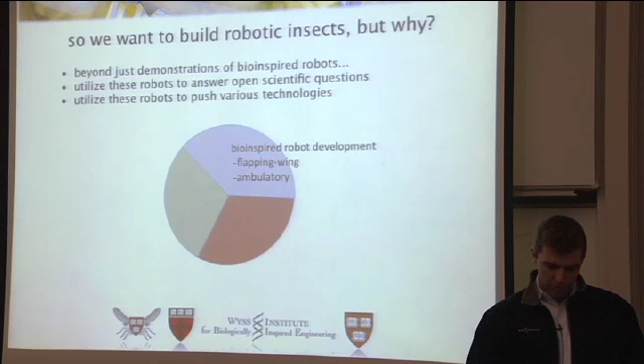One thing I'd like to clarify first is that we are roboticists, and we're making, for example, robotic insects. Why do we want to do this? Not just to make cool robots. In fact, we think a number of different things will come out of the development of flapping wing micro-robots, ambulatory micro-robots, in terms of open scientific questions.

So using the devices for questions in, for example, low Reynolds number flapping wing flight, pushing different control techniques for computation-limited systems, system-level design, as well as doing some technology pushes, like how do we build at these interesting scales, how do we think about milligram-scale power electronics, novel sensors and actuators, etc. These are the themes of my group.

What I'm going to talk about is a little bit of an overview of insect flight to get everybody on the same page. How do we build these things? If we can build them, how do we start thinking about design for these systems? In particular, they're extremely complex, and I'll get into that.

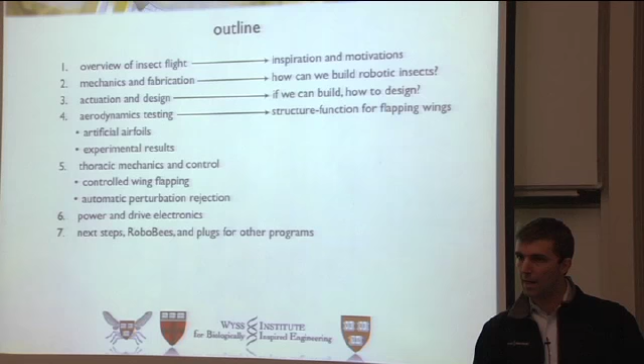As I mentioned in the previous slide, how can we use some of these devices to study structure-function relationships for flapping wing devices, both natural and artificial? How can we think about control for these systems? How do we power them? And then in the end, if I have time, I'll talk about a new program we have called RoboBees, a large NSF program developing a colony of autonomous robotic bees, as well as some of our other work in soft robotics, programmable matter, ambulatory robots, and soft orthotic devices.

First, to get everybody set up on the same page: how do insects fly? This is remarkably different, of course, than what we would consider for classical fixed-wing aircraft. In fact, a lot of these insights were discovered by one of our colleagues back at Berkeley, Michael Dickinson.

He did some very phenomenal work creating dynamically scaled models of what actual insect wings are doing. He observed actual insects, Drosophila in this case, in free flight, looked at what the wings were actually doing, created dynamically scaled models of these systems, immersed them in things like mineral oil to match Reynolds numbers, then flapped those same trajectories in the wings and measured forces and moments acting on the wings. They were able to identify some key components of what they collectively called unsteady aerodynamics.

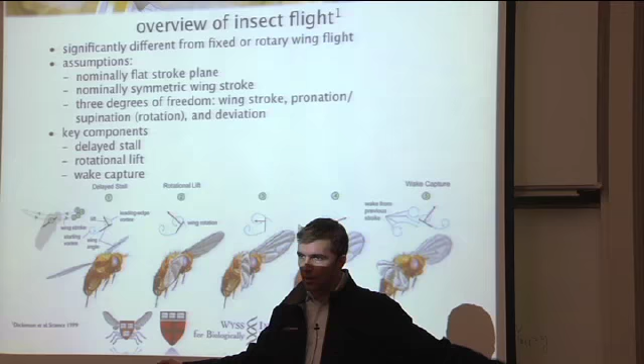Assume we have an insect with two wings, like flies, with nominally flat wing trajectories, symmetric and periodic, with 2 degrees of freedom. There are 3 potential degrees of freedom in the 3 Euler angles, but I'm only going to talk about flapping the wing in a horizontal stroke plane and simultaneous rotation, pronation and supination about an axis parallel to the leading edge. You can think of this as treading water in air.

And what they were able to do is identify, quantify, and qualify different flow phenomena associated with these motions at the Reynolds numbers we're talking about. These things are as follows.

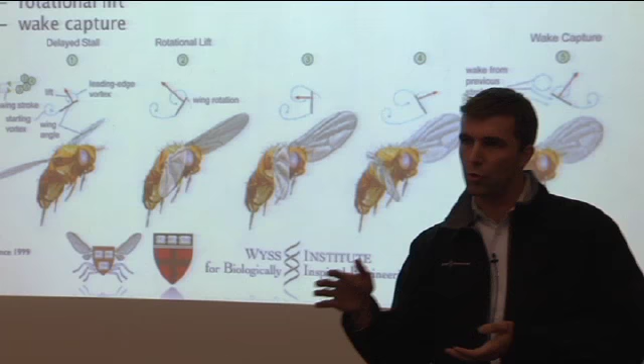Insects, and flies in particular, are able to maintain very high angles of attack throughout the majority of the wing stroke. If you took an aircraft wing at higher Reynolds numbers and put it through even modest angles of attack, the leading edge vortex would grow, become unstable, and shed, causing a catastrophic loss of lift to drag ratio - that's called stall. Insects have the capability to delay stall through mechanisms that stabilize that leading edge vortex. I'm not going to get into those details, but that allows a large angle of attack throughout the wing stroke.

That's one component. Rotational lift - at the end of each stroke, you have this quick flip, which gives you a rotational component to your force, in a way like a curveball.

And then finally, there's this pocket of fluid that I'm carrying behind my wing. As I reverse my stroke, I hit that fluid to get an instantaneous increase in the effective velocity that I'm seeing. So all of these sum up to these unsteady aerodynamic things that are happening, and they gave us an understanding of what's going on.

They basically said, well, you do a number of these different things - you move your wings in this particular way at these velocities and kinematics, and you should be able to do things like get off the ground, which is what we showed. So that's great, now we're all on the same page.

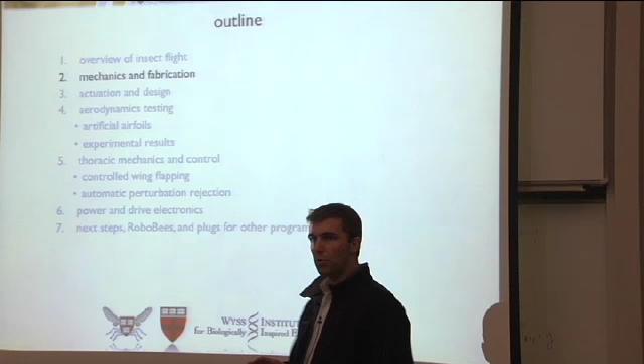Now we get into topics of, with that understanding, how do we start thinking about building these structures? First thing I'm going to do is get into a little bit about the basics of the structures I'm going to talk about.

We're talking about a structure which can flap its wings, 2 degrees of freedom each. It looks loosely like this, with some actuator - I'll get into the details of all these components - which has a roughly linear output, and a transmission system which maps the linear motion of the actuator into rotations at the base of the wing hinge, creating some of these motions.

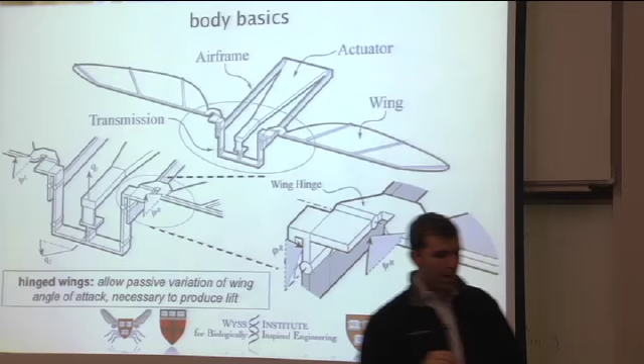So we take advantage of some passive dynamics, and without getting into too much detail, we think that's a very effective and efficient thing to do for power distribution, for something that's putting the vast majority of its power into overcoming mg. Okay, so that's the basics.

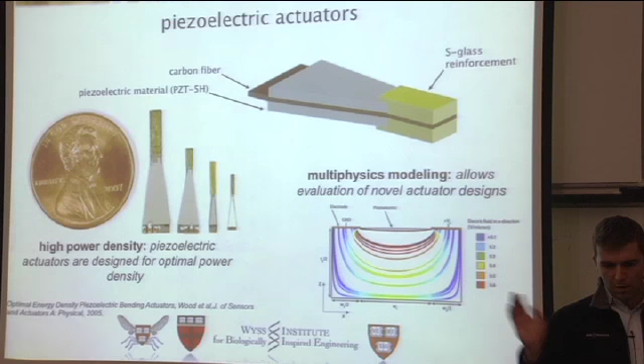Piezoelectric actuators - I'll come back to this - but we have the ability to manufacture piezoelectric actuators which are appropriate for these scales and operating frequencies, probably not appropriate for much larger scale systems, but for these they work fairly well. I'll get into that later on.

Because we're going to start trying to look at how the wing is moving and deforming during flapping, and how we can understand those different deformation modes in terms of the aerodynamic structures of the wing. Question - what's the scale, size scale? The wing itself is about 15 millimeters, so this is about 15 millimeters.

So, okay, that said, how do we start to build these structures?

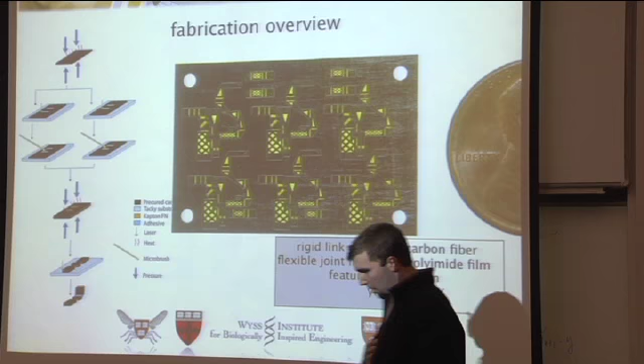I usually put this in a motivation slide, but I figured I didn't need to, since we're not going to be building these structures with macro-scale machining techniques. That should be fairly obvious given resolution limitations, as well as the things you'd classically do at larger scales using bearing joints or rigid links. The physics of scaling says that as you get smaller, your surface area to volume ratio increases, and things relying on surface contacts become extremely inefficient or simply freeze up.

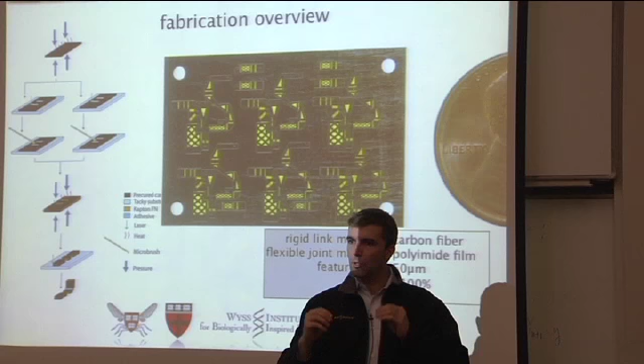So instead, very intuitively and simply, we rely on compliant mechanisms, flexure mechanisms, with distributed compliance about quasi-two-dimensional structures. I'll briefly explain how we make these things. The basic structure is simple: you have two rigid face sheets of some rigid material, typically composite materials, ultra-high modulus composites. They sandwich a thin film polymer. Where there are gaps in the face sheets, there's a flexible joint. Where there aren't, there's a rigid component.

The nice thing about this is you can do this in arbitrary two-dimensional patterns. It's provable that given proper design over your two-dimensional systems, you can create three-dimensional systems with any number of arbitrary degrees of freedom, from zero to very large. So after this process of cutting, micromachining, stacking, and laminating, you're left with these different quasi-two-dimensional components.

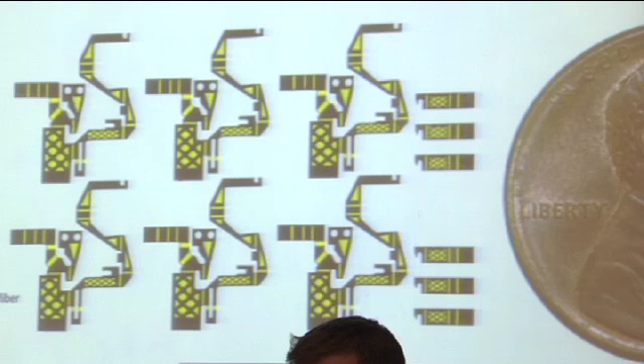We've recently had some nice success in being able to batch fabricate these things. The goal, I should say, isn't only to produce transmission systems with particular qualities, but to do this extremely cheap and extremely fast. I'm very impatient.

Furthermore, our group is extremely empirical. One reason is because we know so little about the things we're studying that we need to build them and learn by doing, learn by failure. So what we really want is a process cycle that goes from concept, design, fabrication, assembly, testing - we always test to failure - and analysis, all within the scope of a week. We can do that now with features on the order of 50 microns, yields nearly 100%, and alignment that's nearly perfect.

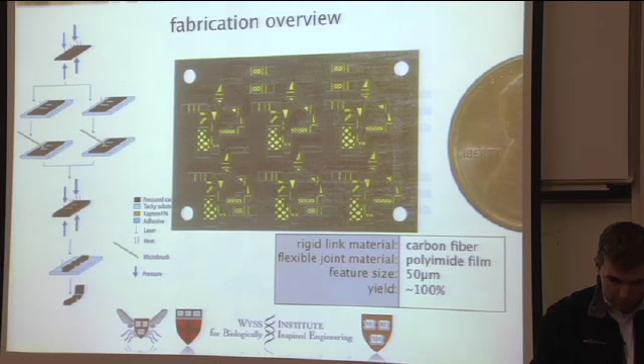Without getting into too much detail, we can use these techniques to make things like rigid airframes, and what you saw on the previous slide are unfolded versions of spherical 5-bars. I won't get into the details, but you'll notice they have features such that when you assemble these things, you fold them into a single configuration forming the three-dimensional structure you want. In this case, on the upper right is a spherical 5-bar transmission mechanism, another variant for flapping the wing in 2 degrees of freedom.

Things like full-on wing drivers, I'll come back to these structures. Nonetheless, we can build these structures - actuators, various components, airfoils, which I'll come back to with more details. This is very important: we want to take notions of the gross morphology of natural wings, for example, and start to understand what's actually going on by building the structures and actually testing them.

So how do we build them? I'll come back to that. Okay, so very briefly, that's how we can make things.

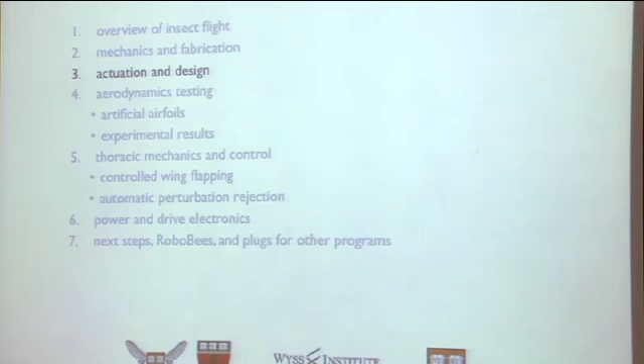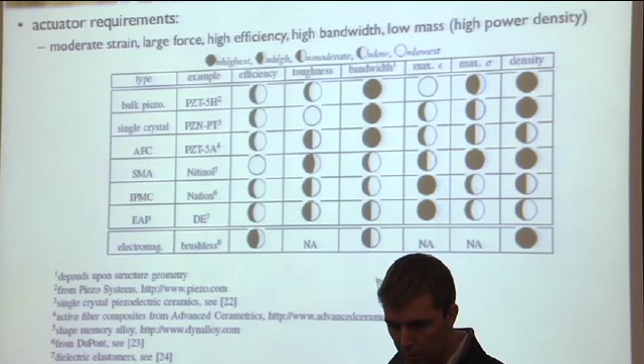Now the next question is, how do we start to actuate these things? This is actually the subject of some of my graduate work, where we said what we really want is an oscillating input into this resonant system. Hypothetically we'd use electromagnetic motors, if it weren't for a number of issues. The physics of scaling says bearing joints are very costly in terms of efficiency, but there are more subtle things, like current density considerations for how much power you can dump into a coil of wires as you decrease its characteristic dimensions. Also, we really want an oscillatory input, so if we wanted a rotary input converted to oscillatory, we'd need intermediate mechanisms.

So what we did was look at a number of induced strain materials - taking some simple stimulus and converting it to some simple length change.

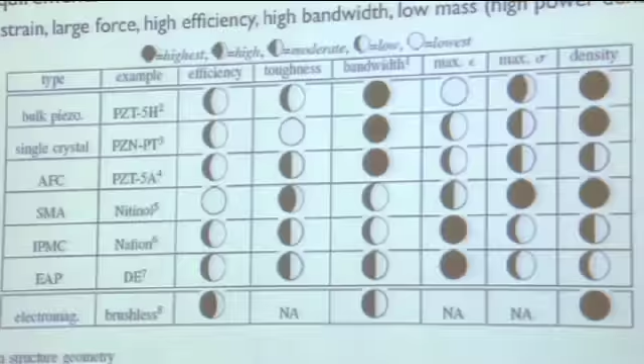Things like piezoelectric materials, be they bulk or single crystal, phase transition materials, electroactive polymers, be they ionic or dielectric - with these we could start to think about very simple models of a harmonically oscillating system, transferring mechanical work from the actuator through a transmission system to the wings. We do this for a couple of design breakpoints for various classes of vehicles, using simple geometric models for what these actuators might look like as a function of these different materials, then ask: as a function of force and displacement, or frequency and work, or mass and power density, what is the appropriate actuation technology?

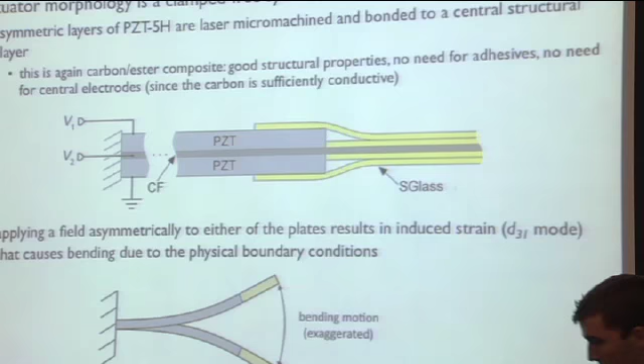We settled upon these quite simple structures, clamp-free bending bimorph cantilever structures. You can think of these as two parallel piezoelectric plates. You apply a field to the upper plate - let's say it wants to contract, but it can't because it's constrained by its boundary conditions, so it bends. You do this on the opposite plate, and it bends the other direction.

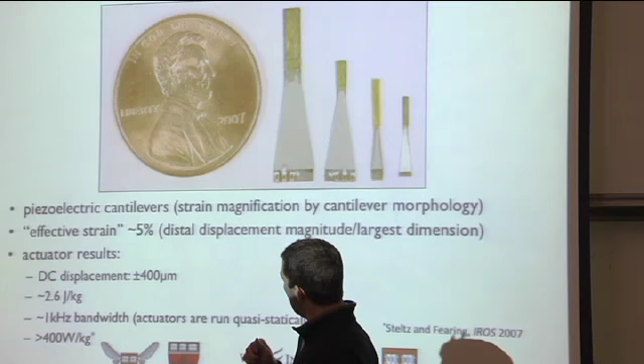They're very simple, very easy to make, and we can make them across a variety of scales. They have a very high bandwidth, which is good for the frequencies of operation we're talking about, on the order of hundreds of hertz. But they have negative sides too - they're quite brittle, basically strain limited in their operation. The point of the clamp-free cantilever configuration is to get an effective amplification, a first amplification stage, turning these strain-limited, like 0.1% strains, into 5% effective strain - meaning the largest distal displacement normalized to the largest characteristic length of the actuator.

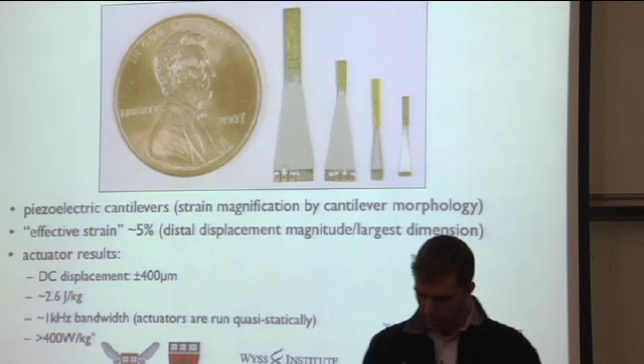But the other nice thing is, since they have a relatively high bandwidth, the power density output of these structures - which is really what we should care about - is approximately a linear function of operating frequency. So we can think about these systems as oscillatory inputs into resonant structures. As the characteristic length of the whole fly, for example, gets smaller, the resonant frequency monotonically increases, and as that resonant frequency increases, these things get better.

We've shown that even though their bulk-free, strain-limited properties are on the order of a couple joules per kilogram of work output - not very good - when operating at 100 to 200 hertz, these things actually get pretty good. They get into the few hundred watts per kilogram range, which is greater than insect flight muscle, and on the order of pretty decent electromagnetic motors, independent of scale.

Now switch gears: we can build things and actuate them, that's great. But how do we start to think about this? The overall goal of the flight apparatus is to provide a platform that stays aloft for as long as possible. So it's not sufficient to just slap together actuators, electronics, transmissions, and expect a nicely operating vehicle. It seems obvious, but it really means we need to do some simple but powerful system-level modeling and analysis.

The point of the next few slides is to say: I've got these different components, they all have their limitations, they could all use more effort to improve them. What's going to be the biggest bang for the buck - for example, if we increase battery energy density or storage capacity, how does that affect the overall flight time, which is our ultimate metric?

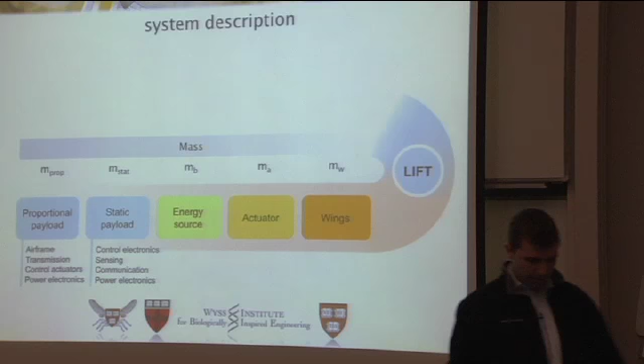We can think about these systems as having two classes of components: lift producers and lift consumers. For lift consumers - payloads, energy source, actuator, whatever - each has an associated mass, and you can think of mass as equivalent to required energy, the energy needed to keep that mass in the air. For lift producers, we think about the energy source and all the different transmission mechanisms - the energy source, the actuator as transducer, mechanical transmission, wings, etc - having certain power outputs, efficiencies, and energy densities.

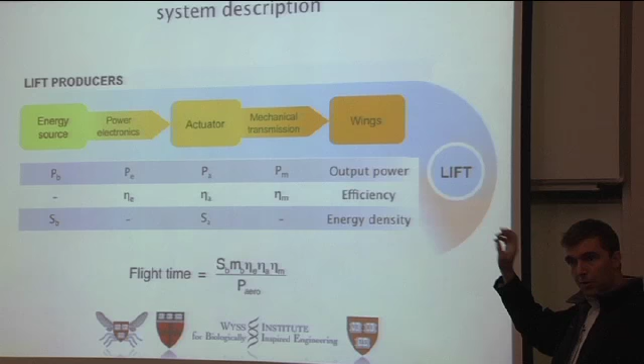And we can then take these and very simply say the flight time is going to be some weighting of all these different terms in terms of the total energy on board, multiplied by all these efficiencies and normalized to masses and powers, etc. And P_aero being the power required to overcome mg.

From very simple first principle models of what's going on here, in terms of how do we model the actuator, how do we model the transmission, how can we do some simple models of the transfer of work from the transmission to the air, how can we start to think about navigating this rather complex design space. And then we can think about, if we combine all these different aspects from models of each individual component and plug them into our equation for flight time, how does that look, and how do our choices for some of these geometric parameters compare to natural insects?

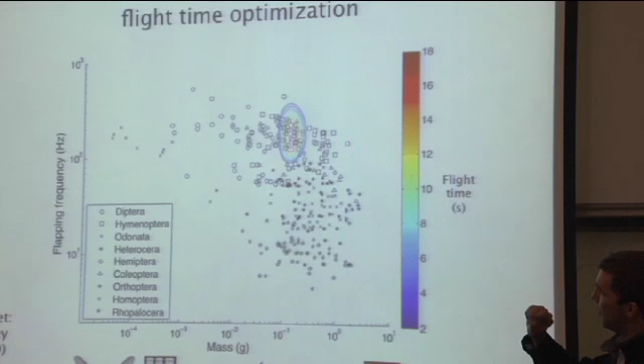So that's what the next few slides are going to show. We can use some well-established trends in the insect literature to say how things like the mass of an insect and its flapping frequency scale, and mass versus wing area, mass versus percentage of flight muscle mass, etc. All of our designs are roughly consistent with what you see across a wide range of different insect species.

But what you'll notice is that given these contours, given the state of the art for all the different components which add up to the flight time estimates I showed in a previous slide, we're estimating a very low flight time, on the order of tens of seconds, which is not terribly good, right?

So what this allows us to do is think about what are our assumptions on where these numbers are coming from. Current existing battery energy densities - we know that from commercial trends. Actuator energy densities - we know that from our own experiments. Power electronics efficiency - we know that from our own experiments. Payloads and these sorts of things - that's state of the art.

What would happen though if we start to improve upon each one of these things? What I'm going to do is say there's some improvement factor from state of the art to whatever that improvement would be, to enhance flight time by improving upon all of these different metrics. And so we can start to look at how sensitive our flight time is, and how this improvement factor changes with changes in these different technologies.

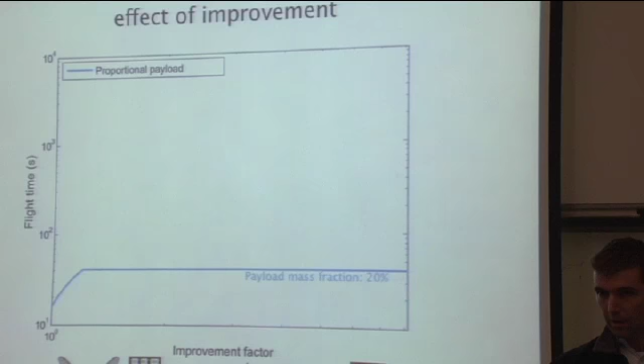So things like payload - well, we also have to put upper bounds on all of these things. Like payload, we have to have some payload for computation and sensing, etc, so we can't reduce that by too much. In terms of actuator energy density, we can increase that a little bit, but we're limited by the strain-limited bulk energy density of these piezoelectric materials, power electronics efficiencies, aerodynamic efficiencies, and the energy densities associated with the onboard power supply.

I'm not going to talk about this, but we have collaborations through the RoboBees project to do micro solid oxide fuel cells, which are appropriate for vehicles of this scale, and we're using that as sort of the best case scenario for what can happen in terms of onboard energy storage.

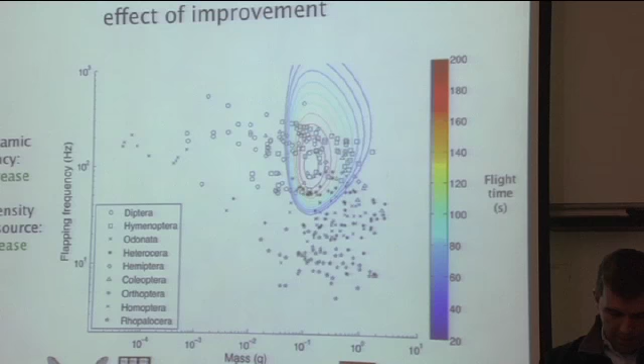So going back to the previous slide - very short flight time, limited mass range - if we start to take some conservative estimates on what we can improve in terms of the different qualities of our system: aerodynamic efficiency, let's say we get 20% better; energy density of the energy source, 50% better - then we can start to improve flight times by an order of magnitude or more.

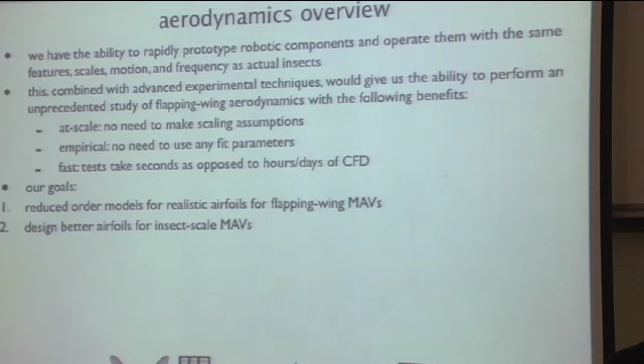The point of these last few slides is just to say, how do we direct our research? So if one of these things isn't going to have much effect on overall flight time, then we're not going to care too much about it. And in fact, what we are going to do is say one of the big wins we think is going to be aerodynamics. So we're going to put a lot of effort into aerodynamic testing, for the purposes of understanding things like the structure-function relationship for natural insects and flapping wing devices, but also for designing better vehicles, which would have higher quality improvements.

To give a higher order overview of some of our aerodynamics testing, a lot of people can start to think about this. If you look at an insect's airfoil, it's quite a complicated structure. You start to think about all of the different design parameters it might have - veins of different sizes, three-dimensional surface topologies, surface texturing, aspect ratios, area distribution. It's very difficult to say what is the function of this particular vein, or what is the function of this surface property.

Some people think about doing dynamically scaled models to explore these aerodynamic properties, and our biologist colleagues have done this, leading to remarkable breakthroughs in understanding. But certain things fundamentally scale in different ways. If you dynamically scale models to match Reynolds numbers, you're matching the ratio of inertial to viscous forces, but you're not doing anything with aeroelasticity - compliance scales in a fundamentally different way. You start to think about doing these things with biological studies, but then you're limited to what you can get biology to do, which is not a lot and very frustrating.

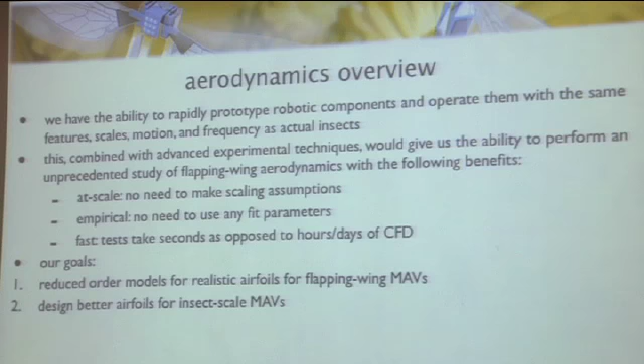We're not computational fluid dynamicists, and furthermore, the things I'm about to tell you we can do in time scales much faster than the best supercomputers can solve the partial differential equations which would define the flow around these structures. So we're not aerodynamicists, we're roboticists, and the goal is to use our tools in fabrication and actuation to manufacture airfoils and flap them around, to study how we understand the role of different morphological features in natural insect wings, and how we can apply this to the design of better micro air vehicles. It's highly empirical.

So the first question is, how can we manufacture these airfoils? We've done this a couple ways. The first way, which I won't talk about much, is to merge our fabrication techniques with soft lithography techniques to make micromolded channels that you use to sculpt carbon fiber venation patterns. If you do this and copy the gross morphological features, at least in two dimensions, of some natural insect wings, it matches up with static stiffness properties, and it looks like it matches nicely to the particular species.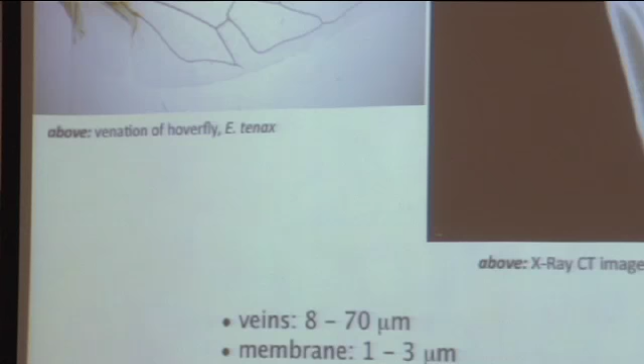But what we really want to do is say - well, that was very difficult to make those wings, so that's the thing I'm not telling you. We'd like to make wings which we can rapidly prototype, consistent with the rest of our philosophy. But it doesn't capture the richest set of morphological features that we might want to look at.

If we look at this micro CT scan of a hoverfly wing, from base to tip it's got these corrugation patterns and really rich geometrical features. What we really want to do is be able to rapidly prototype wings which can capture a lot of these different features.

Now we're starting with an insect wing. You might protest and say, well, why are you just starting with an insect wing? The reality is because we don't know any better. We're starting from basically very little information on these systems, so we figured it was best to mimic a system which does work.

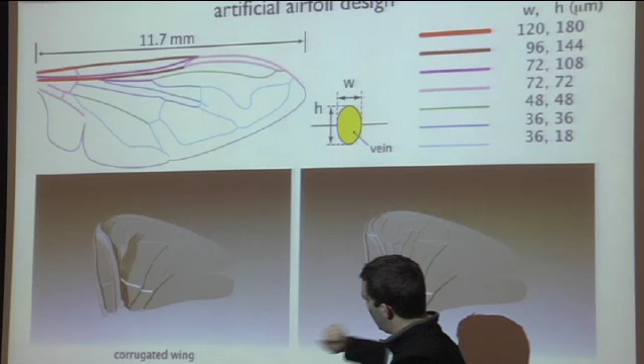So what we did was take that three-dimensional data, create a three-dimensional CAD model, and start to slice this. I'll show you how we recreate this in a minute, but one thing these next few slides point out is that if we can make airfoils with these different morphological features, we can start to ask what happens if I have a 2D versus a 3D wing, and what penalties do I pay for losing that third dimension. I'll come back to that in a minute.

First question is, how do we make these things? We've decided upon a micromolding process which utilizes calibrated laser ablation of, in this case, silicon wafers. You basically take your three-dimensional CAD models of the wings, slice them, and use each of those slices to remove a layer of material from a silicon wafer to make micromolded channels. We can do this now.

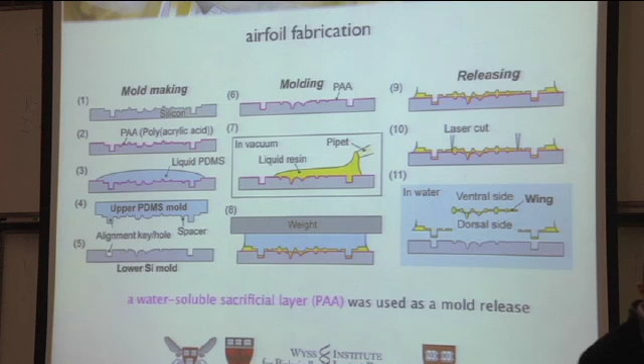Mind you, laser micromachining is a fundamentally aspect ratio limited process, so you're never going to get perfect sidewalls, but you can do a number of different profiles. We had a paper in JMM not too long ago describing the molding process. There are engineering tricks here, like release layers and using compliant upper molds and rigid lower molds, but we can make these molds out of selective laser ablation. You can see the difference between corrugated and uncorrugated molds.

We can make the wings using a molding process. And lo and behold, if you again go back and start poking on these wings and testing their static stiffness properties distributed over the surface of the wing, you get similar characteristics as you get in actual insects, and you do indeed see a dramatic difference between corrugated and non-corrugated wings.

But that's not enough. We'd really like to test these things in a dynamic setting. So what we've done is put a lot of emphasis into an overall system. It's in its second revision now, but the overall vision is the following.

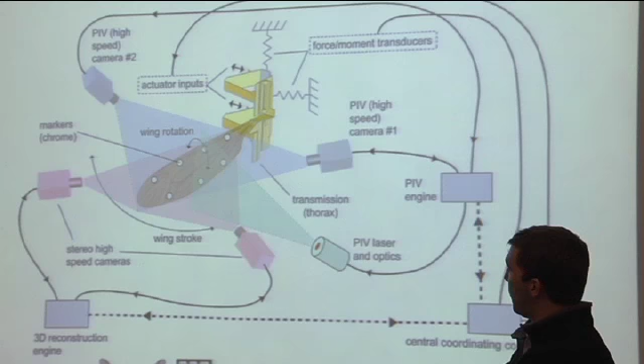You have a system where you make certain wings, maybe put features on the wings, I'll get to that. You drive the wings with multiple degrees of freedom. One of the things I failed to mention is that we can now put feedback control on the internal state of the device, so that we can actually do feedback control over wing motions and get whatever wing motions we want for the most part.

Drive the wings, mount it to a multi-axis force sensor, use multiple high-speed cameras to automatically measure motions and deformations of the surface of the wing, and also illuminate with lasers and look at flow structures if we wanted to, using particle image velocimetry, and trigger and control all of that through an automated system.

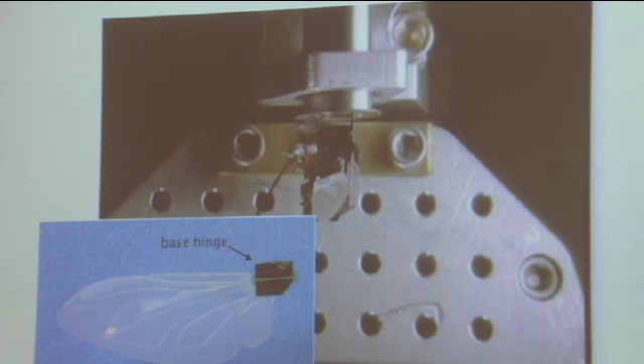Here's one of the first generation results. Here's one of the wings that Dr. Hiroto Tanaka had made. Here it is at low frequencies. Now I'm only commanding flapping in this case, and there's no aerodynamic or inertial load, so it's not rotating with its passive dynamics. Here it is at high frequency. Okay, you all see that.

Of course, you can't see what's going on, so we can start to do these side-by-side comparisons of corrugated versus non-corrugated wings, and start to say, well, qualitatively, there's obviously something going on here. These are taken at 10,000 frames per second, and you can start to see the differences between the deformation patterns associated with corrugated versus uncorrugated wings, and it gets much worse if you start to go with higher aerodynamic loads.

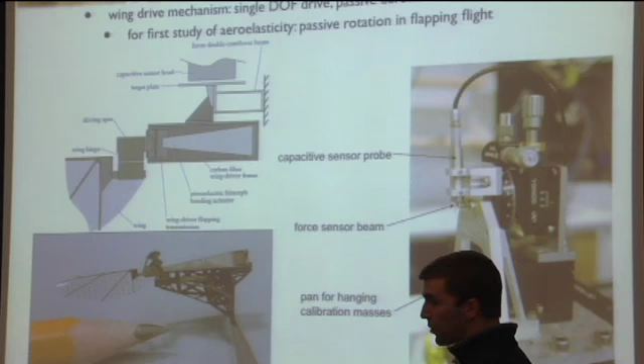All right, but that's still not enough. That's still not quantitative enough for actually extracting anything more meaningful from these structures. What we really want to do is come up with some simplified model for what's going on here, and then use some of these experimental apparatus to look at any number of things. How is this being affected by Reynolds number? How is this being affected by wing aspect ratio? I'm not going to get into all of those details. I'm going to only show you one result.

But basically, we've set up a system. This is the first generation. I'll show you the second generation, where you take your wing structure and you mount it to a force transducer. I think that's on the next slide.

Yes, it turns out that this is a terribly boring subject, but we had to spend a lot of time actually manufacturing multi-axis force sensors. The reason being that there's simply nothing off the shelf which will give you the features that you want. What we want out of these systems is very high bandwidth and very good resolution, and those are paradoxical, of course. You can always make a force sensor have higher bandwidth by trading off bandwidth for sensitivity.

It's almost like the electrical analog of having the gain bandwidth product of an operational amplifier. But nonetheless, you can't get away from that physical reality, and so we had to put a lot of effort into designing a structure which would work on scales of 1 milligram resolution and 1 kilohertz bandwidth, amounting to about 1% of body mass and about 10x the fundamental drive frequency for the vehicle scales of interest. We had to figure out a way to manufacture these things and also do everything we could possibly do as engineering tricks to minimize noise.

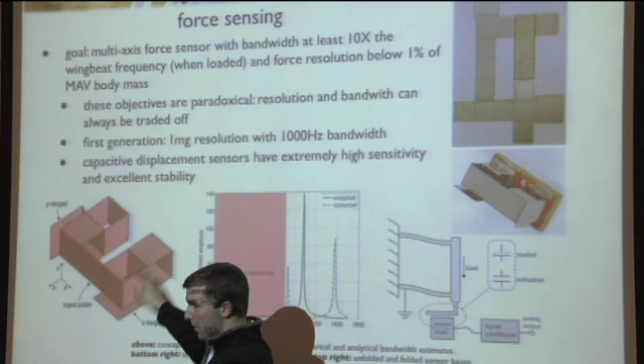Electrical, thermal noise we minimize by making the structure out of INVAR, which is an alloy that has the lowest coefficient of thermal expansion of any alloy in existence, et cetera.

Anyways, it's kind of boring so I won't get into it, but it works. This allows us to do real-time measurements of the forces we measure. We're also making torque sensors, which I'm not going to get into in this talk.

Now let's take a step back. This is our standard wing, which we use to troubleshoot all the different components of the system, where we can take the wing and use shadow masks to put little chrome dots on it. We use some optical microscopy techniques in our high-speed videography to do backlighting so that we can get very high contrast, high resolution images through the high-speed video.

The question is, are there techniques - in this case, one of my students did this a couple years ago - these quasi-steady techniques that exist from work, for example, of Dickinson. People doing these dynamically scaled models can extract out force coefficients which hide all the unsteady terms, which I showed you in one of the first slides, behind these time average force coefficients. You can't just do that - you actually have to look into other coefficients as well. But nonetheless, there are these quasi-steady models. Do they capture the characteristics that we want?

Can we use some of these models to predict things like, not only what is the lift and drag acting on this particular wing integrated over the whole wing, but also can it predict the passive modes of the wing itself, given the fact that you have only one input into the system.

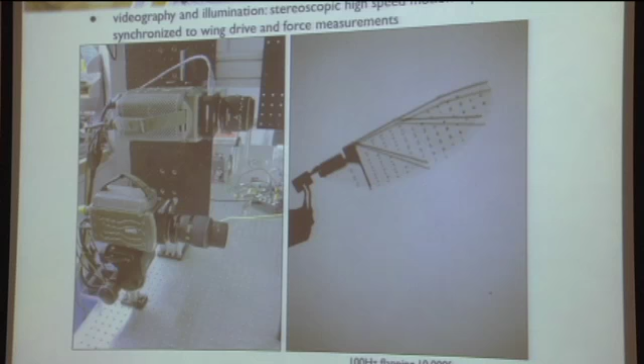So what we did was take these wings with multiple - in this case 2, we're gearing up for 4 - high-speed video camera images, known camera calibration, something called auto stereophotogrammetry. Non-auto stereophotogrammetry is grad students clicking on dots. So taking multiple camera images and doing a bunch of vision tricks, you get out basically a 3D time history representation of all the tracked points. We need 3 or 4 cameras because even with 2 orthogonal views, you get epipolar ambiguities when you try to do some of these vision tricks.

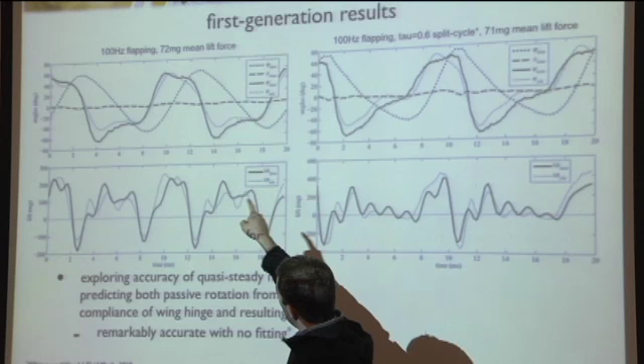Bottom line is, you can ignore the stuff on the right, but on the left the upper traces are us commanding wing flapping angle. We're measuring, using the rigid body modes from the previous video, that we can extract out 3 angles of the wing motion: flapping, rotation, and deviation, and then also measure the forces we're generating and predict the forces based upon those motions in the quasi-steady model, and it matches up very well. The nice thing is there's no fitting here - it just works well enough.

So the answer to my previous question, for this particular Reynolds number - and this is where you should protest and say, well what about other Reynolds numbers or other features of the wing - the answer is, well, that's ongoing. But for this particular Reynolds number, the quasi-steady version is pretty much the 80 or 90% answer.

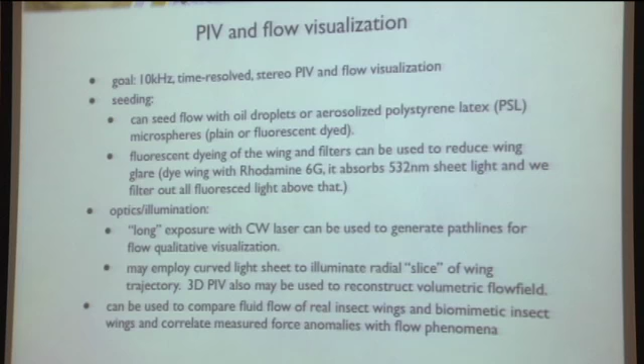We also started some techniques where we can look into the flow structure that we see. We have a system set up now where we can illuminate slices of the flow with a laser - I won't bother telling you about it, I'll just show you. Hopefully this shows up, where we can take the same wing structure and seed the flow with some smoke particles and illuminate it with a light sheet, then process that using commercial off-the-shelf PIV algorithms. Mind you, this is only true at mid-stroke because the laser sheet is not rotating with the wing.

But nonetheless, you can still see some of these classical features which you would expect, like the buildup of a leading edge vortex and the shedding of a trailing edge vortex, et cetera. So this is the first PIV that's been done on flapping wing robotic insects, but that's cheating because nobody else really cares.

Okay, next topic. I'm going to switch topics now. That work is ongoing - I'll be happy to talk to you about it, but basically that sets up the stage to basically set up the experimental infrastructure.

There's things I'm not talking about. We're also developing environmentally controlled chambers where we can suck vacuum or fill with sulfur hexafluoride to do higher density measurements and all these other things, but I'm not going to get into that.

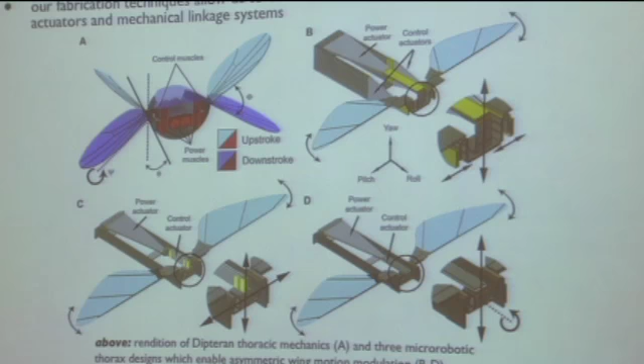I want to get into topics of control, and these are of interest to me. I was trained at Berkeley with some of these topics, and when I got to Berkeley, I was working with Ron Fearing, and this project called the Micromechanical Flying Insect Project had just started. Metin was working on it as well. With my interest, I said, oh, this would be a great controls project to work on, and Ron basically said, well, you got to build them first. So we went off on this tangent of other topics.

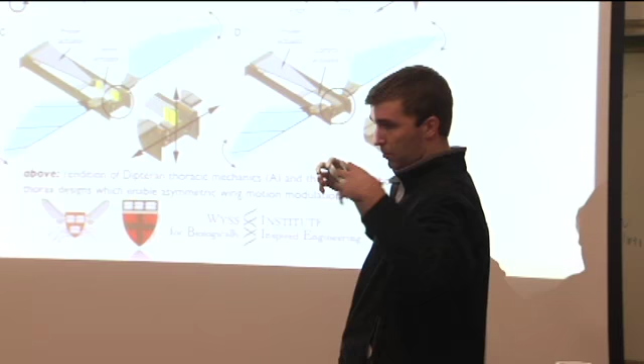But now we're able to actually build the structures, and we can start to think about some of these things. We have systems which we think utilize some of these passive dynamic modes, meaning passive rotations associated with the wing pronation and supination. We're basically dumping all our power into the primary power actuator, resonating the flapping mode, and allowing these other modes to appear passively. We think this is a very efficient way to distribute power in the system. So what we don't want to do is add, for example, big actuators to create controlled body torques or controlled wing asymmetric motions, drawing significant power and taking up volume and mass.

So what we did was look into inspiration from diptera and thoracic mechanics. This is a very crude drawing of a fly thorax where you can start to ask, how does this happen in flies?

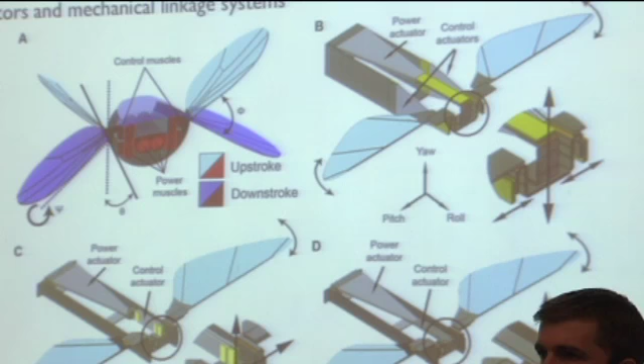I don't want to butcher this because I'm not a biologist, but there's basically a morphological separation of power muscles and control muscles. There are large sets of power muscles which are basically just resonating the thorax, the wing connected at the interface between the thorax and a deformable section, just flapping. Then there's a number of smaller control muscles, I think on the order of 20-something, which insert directly upon the base of the wing hinge and do something. I don't think it's fully mapped out, but basically either injecting very small control torques onto the base of the wing, or adding or removing energy into the system, all for the purpose of creating controlled body torques through wing motion asymmetries.

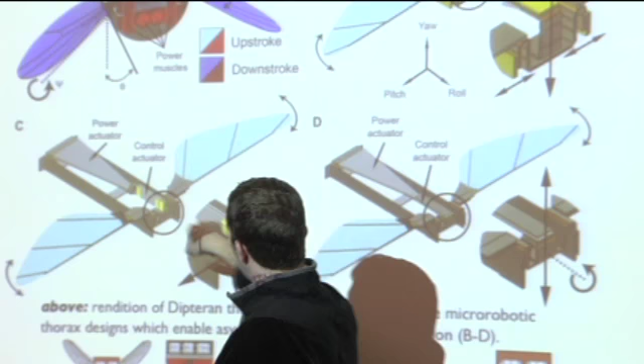So we went into design of various iterations of thoracic mechanics, which include smaller control actuators, which are lower power. They don't have to operate tonically with the wing beat frequency. We can do these things slower, perhaps on scales of maybe 10 wing beats or so.

Here's an example of one of the designs. The point here is, if we take the previous kinematic chain I showed a number of slides ago, and we want to create wing motion asymmetries, how do we do that? There's a number of ways. I'm not going to proclaim that any of these are the optimal way to do it—they're just a couple of examples.

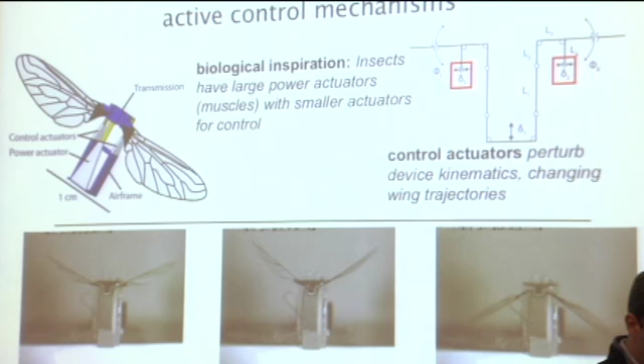One way is thinking about where the mechanical grounds are in this transmission system and starting to move those subtly. If I move those mechanical grounds around, I can think about the transmission as two parallel gearboxes, and if I change the gear ratio on one, I'll have different input-output properties. So we built a structure like this, and if you look carefully at these videos, there's a control actuator here doing very slight changes—plus or minus 100 microns—in the position of this left ground link. You can't see that directly, but if you overlay the maximums of the stroke amplitudes, you can see there's a pronounced difference in the stroke amplitude of the left wing, which is being actuated, versus the right wing, which is not.

We can also incorporate different controlled degrees of freedom within the thoracic mechanics to get stroke plane deviation—I'm not going to get into that. So that's a set of mechanisms by which we can create controlled wing asymmetries.

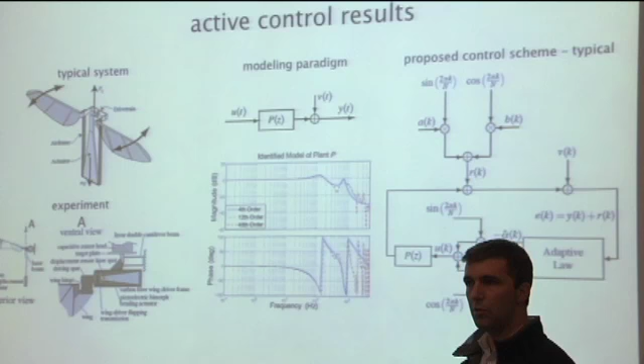There's a whole other suite of topics to talk about, but I want to move on to get to: okay, if you have the ability to control, let's say, modulate amplitude to modulate thrust, for example, or modulate wing asymmetries to modulate body torques, then what?

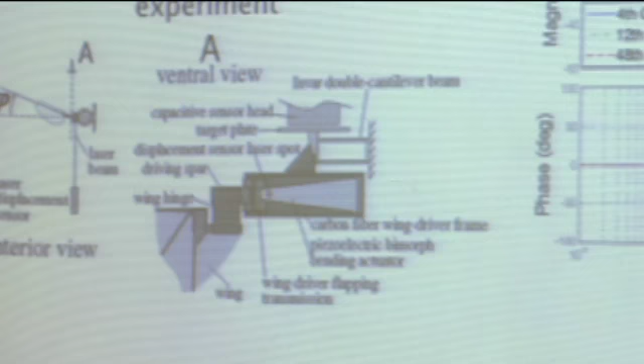There's a relatively new postdoc in my lab looking into adaptive control laws, using online in situ characterization methods, similar to mechanisms I showed for aerodynamic characterization, where we have this wealth of data in terms of forces being generated, power input to the actuator, and the internal configuration of the system by measuring displacement of the actuators. We can take that, do an online characterization, do a dimensional reduction from the entire system down to something more tractable in terms of dimensionality, look at adaptive control laws, control wing motions, and create lookup tables for doing, in this case, thrust control, et cetera.

There's a couple of papers we submitted on that. I'm breezing through that for a reason: that's fine, right? So assume you can manufacture these systems, flap wings around, and use these thoracic mechanics tricks to create asymmetric motions. We're assuming those asymmetric motions create body torques, and that's fine. Then you do some characterization of that, and then you do some either classical or whatever control techniques you want on top of that.

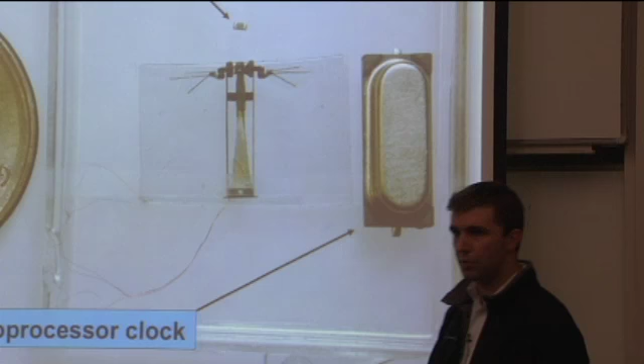But here's an illustrative figure: at some point, you're going to have to do some computation in there. You're going to have to sense some perturbation, some attitude perturbation, for example, and then you're going to have to actuate that, or compute about that, think about that, come up with control inputs into your actuators, and this is a big challenge. These are typical components associated with larger scale computation with microprocessors that you might want to do this with. This is motivation for the following topic.

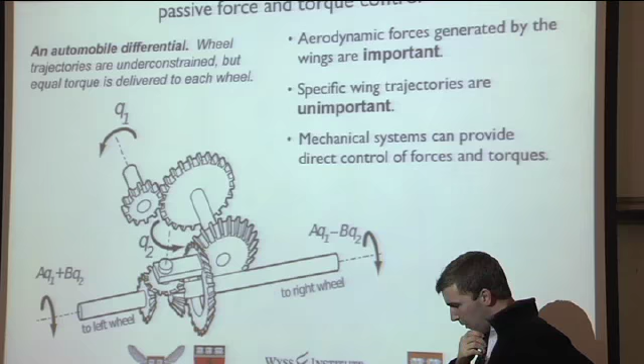Let's think about this for a minute. I'm going to come back to the concept of control, but let's think about a case where we've already got an under-actuated system, where we're commanding a flapping mode and allowing 2 passive degrees of freedom. What happens if one of the wings is imbalanced, meaning if we have some fabrication issue causing asymmetry between the drag torques in one wing versus the other? Well, if I'm calling this roll and I have some asymmetries in the reaction torques at the base of the wing hinge, then I'm going to get a net roll torque.

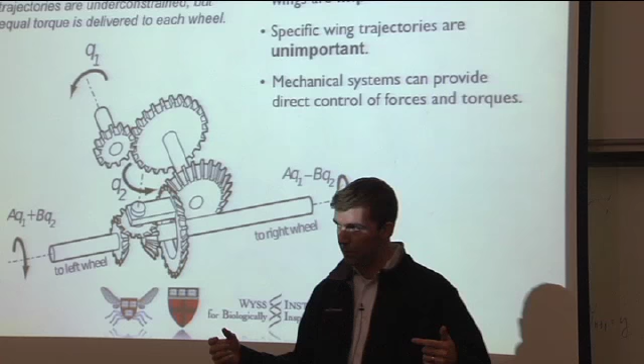Now, similarly, think about driving a car without a differential mechanism. If I want to turn, my wheels are kinematically constrained to be the same, to operate at the same velocities, so one of them is going to slip because it needs to go a longer distance in the same amount of time. This was overcome many, 100 years ago by adding an additional passive mode into the system, an odd mode between the velocities of the 2 wheels, called a differential. Everybody knows this. It's simple.

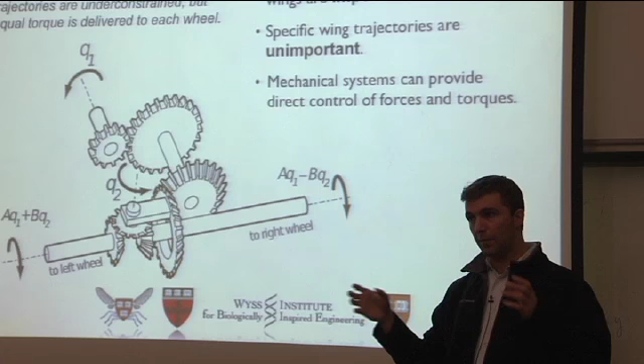It's well established. One of my students came up to me one day and said, well, why do we need to start thinking about what the wings are doing? We don't care what the wings are doing. These wings are strictly end effectors creating forces and torques acting about some point on the wing hinge, and all we really care about are these forces and torques. So why don't we generate systems like a differential? The differential takes an input torque and distributes velocity to the left and right wheels such that the reaction torques at the ground are equal. There's actually a number of different examples of this throughout different structures, wiper blades and Whipple trees, et cetera. We can do the exact same thing within our structures.

So it's sort of counterintuitive where we start to think about including an additional degree of freedom in the transmission system. This is a case where we're concerned with roll torques, although I'll get to other directions for this in a minute, where we do the counterintuitive thing of taking an under-actuated system and making it more under-actuated by adding these passive degrees of freedom into the system.

But if you do this well enough, what happens is that this passive degree of freedom, just like a car differential, will act to balance, to distribute torques from the base of the reaction torques from the base of one wing hinge to the base of the other such that they're equal. What that means is we've done experiments where we created these systems and put this additional degree of freedom in.

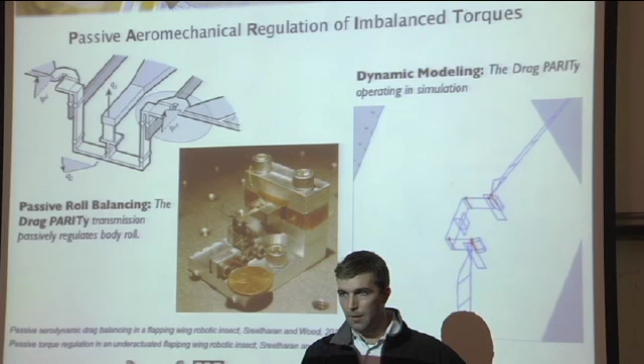If the wings are nominally equal and you have this single actuator input, then the wing motions are going to be nominally the same because the torques are going to be the same, and so the velocities are going to be the same. What happens is if we start to lop off sections of the wing, then you're going to get dramatic differences in the aerodynamic and inertial loads that you see, and in particular the reaction torques that you see as a function of those loads.

And what's going to happen is if I lop off, let's say, my right wing, then I'm going to have less loads there, and so there's going to be a torque imbalance unless the system flaps that wing faster, and that's exactly what happens. This is a concept which he calls passive aeromechanical regulation of imbalanced torques, or parity. I don't know where the Y comes from, but it actually works remarkably well in both simulation and multiple different levels of experiments, which I'm not showing here. And in fact, he won best student paper at RSS for this concept.

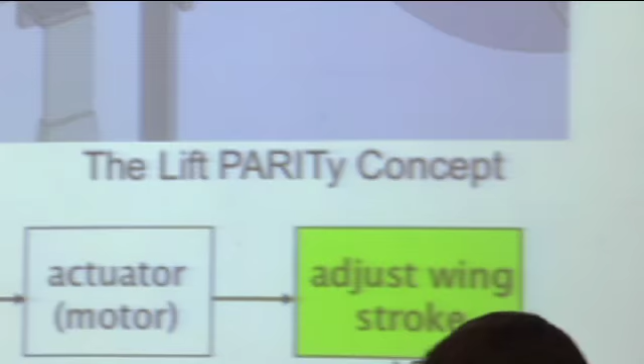And the whole concept, which is what we're trying to frame now, is the classical thing that you think about in these systems is: well, I've got some undesired input into my system, a torque. I've got something which is sensing that. I do some computation on it. I then have some actuator input to correct it, and there's my feedback loop.

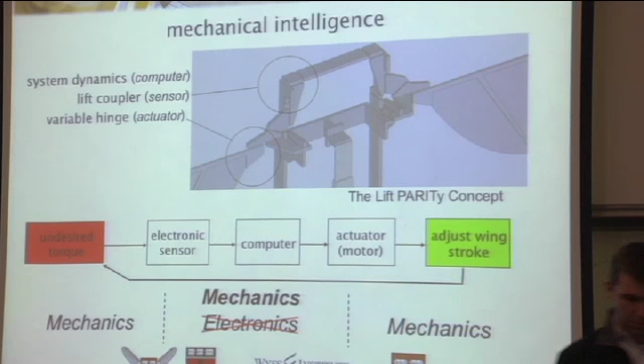Well, no — let's do this all mechanically, in a concept we're thinking about with mechanical intelligence. This is a diagram which I'm not going to get into because we haven't built it yet, but basically we can extend this concept to all body degrees of freedom. The nice thing about this is what it does is basically an automatic rejection of high frequency perturbations and allows you to think about control on a very slow time scale. So it alleviates — it's not going to solve all computation tricks, but of course it's going to alleviate the needs of computation for these systems, which are going to be extremely computation limited.

Okay, the last major topic I'm going to talk about is power electronics. One of the things I didn't mention — here's our assumptions for what we might have. I mentioned that we have this collaboration with Sriram Ramanathan, who actually recently had a paper out which demonstrated the world's highest energy density on-chip microfuel cells. I don't know the numbers, but also the lowest temperature, which is important from my very limited understanding of the chemistry of those systems.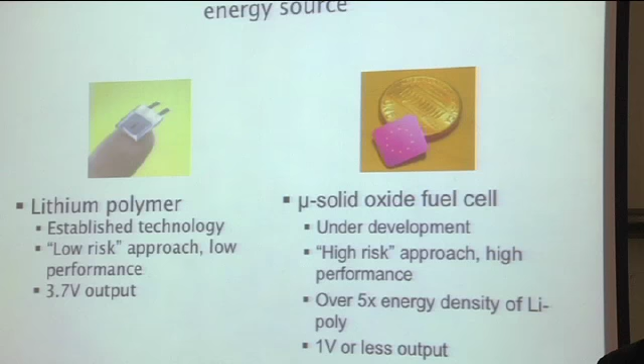But the low risk option is, of course, lithium polymer batteries. We've been doing a very silly thing — it's very silly. Turns out that all of these different batteries that we see, lithium polymers for example, you can watch the trend of these batteries as they scale down in terms of their capacity as a function of scale, and they follow a pretty good trend. They don't get down as small as we would need. If they did, they would seem to work okay, and that was actually going back to our previous discussion on our assumptions for flight time, based upon some of these numbers — but they don't exist in the form factors that we want. So actually what you can do is go in an inert atmosphere and cut these things apart and tape them back together in a smaller form factor, which is very silly.

Nonetheless, that's not important. Actuation I already told you about. One of the difficulties associated with these actuators is that they require relatively high voltages. And so how do we take these battery voltages from, you know, 3-ish volts up to 200 to 300 volts, and do this in a 10 milligram scale package, and do this with very high efficiency?

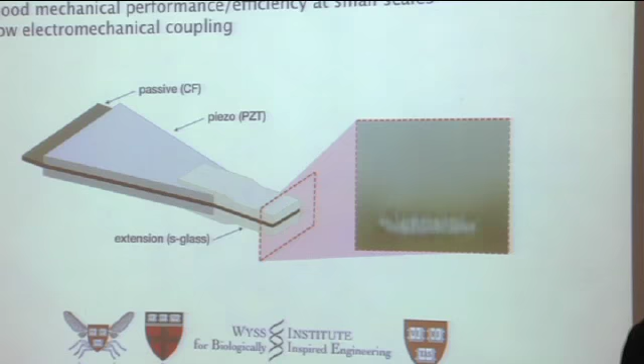And furthermore, one of the subtleties about this is that we have these systems, for example like a bimorph, where you're putting charge on one of the half plates, or one of the plates, for one half of the cycle. It has relatively poor electromechanical coupling, and so there's going to be some residual charge there. So you don't want to just throw that away.

Instead, what you do is for one period of harmonic oscillation, you take charge from one half period and put it on the other plate for the next half period. That actually increases your efficiency of the whole system from about 5% to like 20 to 30%.

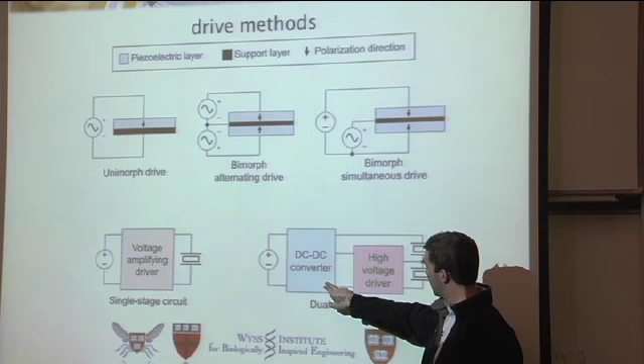There's multiple different driver topologies which we can do. For example, single stage circuits which both boost and amplify drive signals into the actuator directly, or dual stage circuits which do a separate boost converter and then distribute high voltage to the plates of the actuator in a separate stage. I won't get into too many of these details.

The ones that we're implementing now are these tapped inductor boost converter circuits, which amplify based upon turns ratios and switching duty cycles, and they can get us from battery voltage to a couple hundred volts at very high efficiencies. We've actually just taped out a circuit which does exactly this, which is now thinking about how to do that charge recovery by intelligently taking little packets of charge and putting them on both of the plates as required by an external controller.

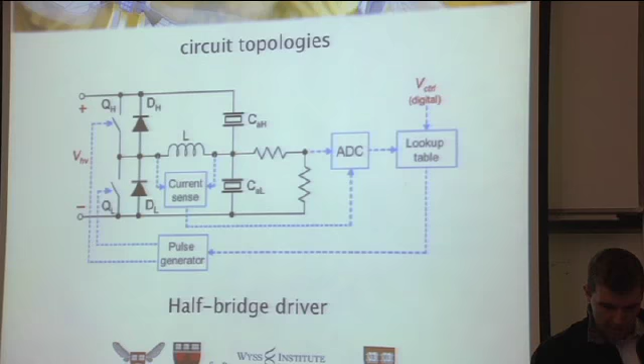One of the issues, though, is how do we actually build these things? We do this using the least amount of discrete components as possible for the first iterations. One of the unfortunate things about all of these different circuit topologies we've considered, the tapped inductor boost auto transformer circuits, things like piezoelectric transformers, or charge pump ladder stages, is they're all going to require some external components at this point. In this case, it's going to be magnetic components. So nothing off the shelf existed, of course.

So what we did was we took these ferrite materials and laser micromachined E-cores and built a winding system to make some of the highest energy density magnetic components for these scales. But again, nobody really cares other than us.

We also have some bare die high voltage transistors, and we've recently taped out—I'm not including any information on it—but we've recently taped out the control circuit to do this, and it actually entirely works.

At the point of the takeoff video that I showed you, we had basically an external controller, which was piezo amps and signal processing, etc., which is this big 200 kilogram rack. And I said to my student, Mike Karpelson, 'Well, you get 200 kilograms down to 10 milligrams and you can graduate.' He's actually graduating soon.

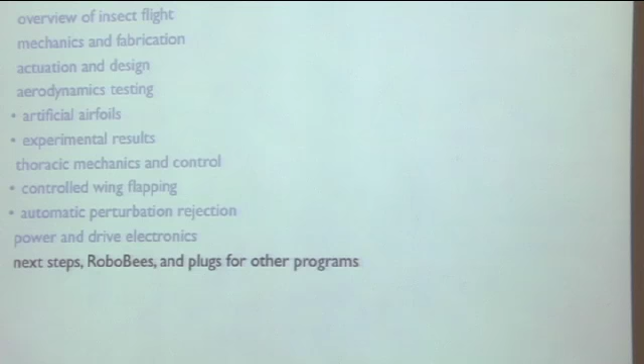Okay, so the next steps—I have a few minutes to talk about a couple of our other programs, which you may or may not be interested in. First is, what is the current and future work?

I don't need to really go into this, but different thoracic mechanics designs, control experiments. We're just in the process of setting up different control experiments, in particular altitude control and attitude control experiments.

Aerodynamics testing is the subject of another PhD student, Peter Whitney, who's ramping up to do some of those same aerodynamic studies, but across a variety of different wing morphological parameters, actually integrating some of the power electronics and power sources onto the structure to do some of the same very simple lift-to-weight measurements.

Actuator optimizations—there's a little bit left to squeeze out of the actuators. New fabrication techniques, studies on multiple wings, etc.

RoboBees. So we recently got together a team of people, mostly at Harvard, with me as PI, and we went and pitched this concept of a colony of autonomous robotic bees to the NSF and their Expeditions in Computing, which is the largest non-center grant that the NSF has. And they liked it, so they said go ahead.

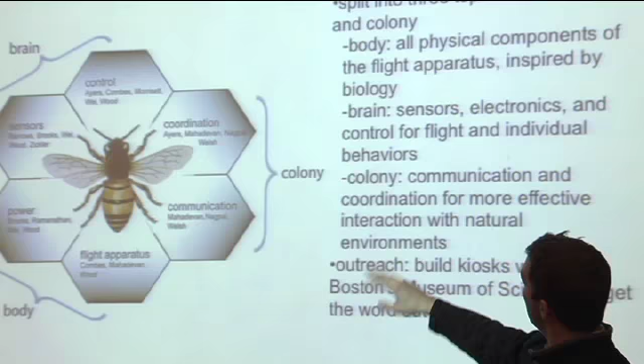What we're doing in this is we've separated the project, the creation of autonomous robotic bees, into three different components: body, all things associated with the flight apparatus. This, of course, is leveraging some of the work that we have previously done and are currently doing in my lab, as well as some collaborations with some biologists.

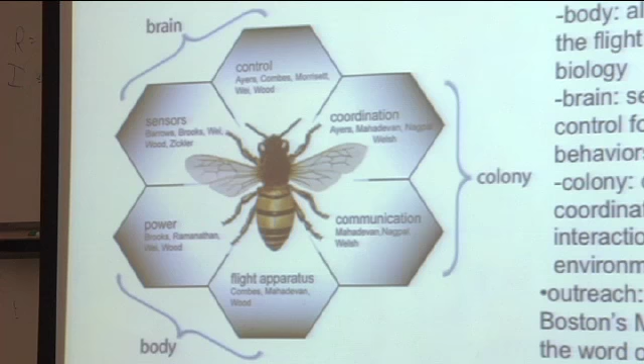Brain, which is all things associated with sensors. We're collaborating with some vision experts, as well as a guy named Jeff Barrows, who has a small company making insect-inspired vision sensors. Colony, which is thinking about how to have coordination algorithms which cause these things in aggregate to have greater performance than the sum of the parts—things like distributed operating systems and coordination algorithms.

We also have a fair bit of outreach activity in this. Here are the people.

Anyways, not that you really care, but the goal is a coordinated colony of robotic bees. And I think that's it.

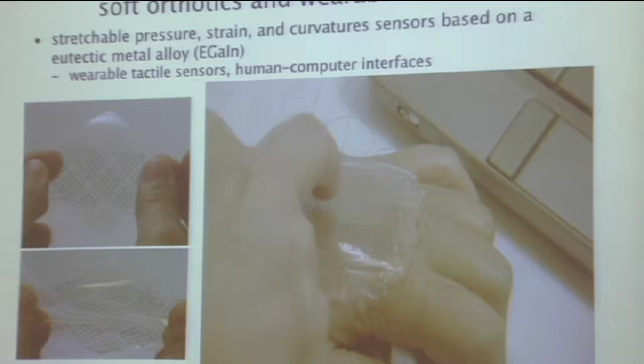Okay, we've also had some work in, now this is another soft robotics project where we're trying to embed functionality, a wide spectrum of functionality: sensors, actuators, electrical functionality, resistors, capacitors, inductors, gated components, stiffness change components, all within entirely soft structures. So no tricks here — you can get softness out of different geometric tricks or materials, but we use entirely soft or liquid phase materials.

This is an example of a stretchable, hyperelastic plastic keypad that they made. The way this is made is basically by multiple layers of microfluidic channels filled with a room temperature liquid metal, which is the eutectic alloy of gallium and indium. So it enables things like human-computer interfaces, and there's actually a project sponsored by the NSF looking into entirely wearable assistive orthotic devices to correct for or assist people with neuromuscular disorders.

Another one is programmable matter, where we had the concept with a team at MIT, Berkeley, and Penn, creating self-folding sheets of robotic origami to make reconfigurable systems. One of the motivations here—we were mostly on the mechanics and actuation side—but one of the motivations of these sheets was not only were we working with Erik Demaine, who's a computational origami expert, but also because you alleviate some of the considerations of making and breaking connections by having these.

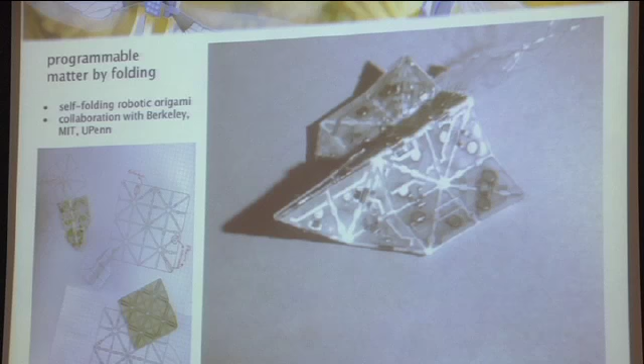And this was a couple of simple shapes that we made. You can kind of get the idea. This is real time, so it's very slow. Anyways, this kind of grew out of some of the layered laser machining techniques that we use for these robots as well. And I think this is the last slide.

We actually do some work in ambulatory structures where we make hexapod-like robots, myriapod, centipede-inspired robots, where we use these not just to make cool robots, but to study things like what is the optimum number of legs, how compliant the leg needs to be as a function of body mass and operating frequencies, and all these other things, as well as to push for batch fabrication, batch mesoscale fabrication techniques.

Yeah, the most interesting part of the video is the last half second, but the nice thing about using some of these techniques is that they have relatively high bandwidth. So I think that's it. Yes, that's it.

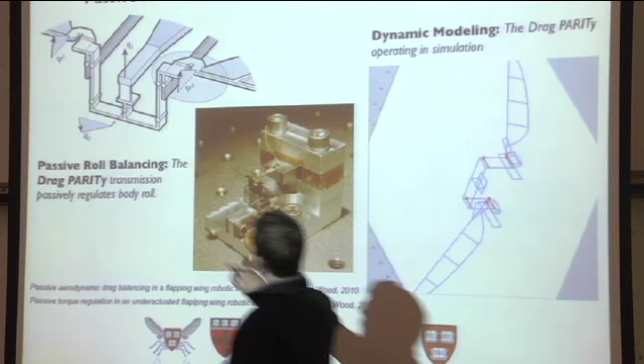Yes, I think I can answer that. If you take this system, for example, what happens is there are reaction torques generated, let's call it roll, along these axes at the base of each wing hinge. If they're equal, nothing happens—it looks like the previous transmission. If they're not equal, there's greater force on one side than the other, and by the geometry of this transmission mechanism, it acts to increase velocity until those forces are equalized.

What you can do now—in a perfect world that's just keeping you steady, rejecting any perturbations of torques on these various axes. But you don't want to just sit there; you want to move forward, do something else. So what you can do, though we haven't done this yet, is take this and move it from side to side. Now you're balancing your reaction torques about a different equilibrium position, which is not balanced, but it still takes care of your high frequency perturbations. So it has those nice features, but now you can change the fulcrum of the seesaw on a slower time constant.

So is that along the lines of what you're thinking? Yeah, that's one—I'm sure there are many different things, from takeoff to descent for example. They're probably coupled a lot more with perception. Yes, true. So that's an overly simplified way we've been thinking about it: taking these balanced equilibrium systems and changing where they're balancing around.

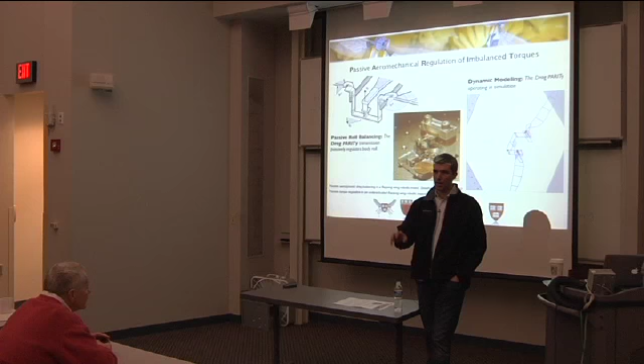I didn't include that because it's too preliminary, but our initial indications are that for the same mass and input conditions—wing mass, wing inertia, input conditions—with corrugation versus without, the corrugated structures are outperforming. The percentages would be like 30%? I don't remember off the top of my head. We haven't done enough of a study for me to say concretely, but initial indications are that, yes.

But that could be biased, because if you look at it, we need to compare apples to apples here. What's really happening is that the non-corrugated, flat wings are deforming so much that it's hard to define the axis of rotation, and how these things are actually deforming is obviously affecting their thrust. So we need to come up with, and we have some thoughts on this, a more apples-to-apples comparison where perhaps you don't allow passive rotation—you make sure the rotation is actually arising out of deformation of the wing itself, for example, and that might help.

So I have a two-part question. The first is about the thing with the tactile sensor—what kind of support electronics, support power, support computation does it need? And really the question I'm asking is: what will it take to get it on my Snake robot?

Actually, when we were talking earlier, this is one of the things I was thinking about. So, sorry, let me get to it. Great minds think alike.

Okay, so I don't know why I needed to bring this up, but not much. These things are very easy to make. They're standard microfluidic soft lithography techniques to make these channels. There's some tricks in filling the channels with the liquid metal, but that's just an engineering trick.

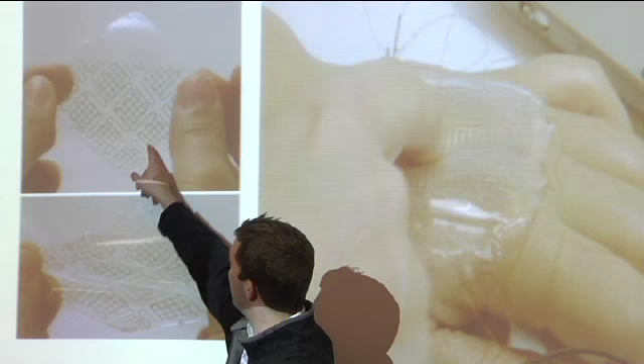And what happens in these cases is quite simple. I push down. There's rows and columns, and as I push down on a part of this, it's changing the cross-sectional geometry of that area underneath where I'm pressing, and it's a liquid metal. You're changing the cross-section of the channel that the metal is filled in, so you're changing the resistance, and so you just measure it as a resistance change.

And how robust is this? How much can you beat the crap out of it? With PDMS versions, you can get up to 300% strain. We actually wrote a paper on stressing it to failure. With other versions, like EcoFlex versions, which are slightly more difficult to make, you get 1,000% strain.

Okay. So then my follow-up question to that is, so the devices you presented are impressive. I'm not trying to be an armchair micro aerial vehicle guy. I think let's just push you a little bit, maybe 5, 10 years from now. So I was wondering about the issue of onboard power for all of your devices.

I realize there's other things you have to think about first. And it would seem to me that on the scales you're talking about, there are other power issues above and beyond power density. Like, for example, is heat an issue? So I'm curious, what are those issues you have? And the follow-up to that would be, if you had the added weight and all these other added issues with onboard power, how would that change your designs? Would your wing flap be longer or stroke faster, or something like that?